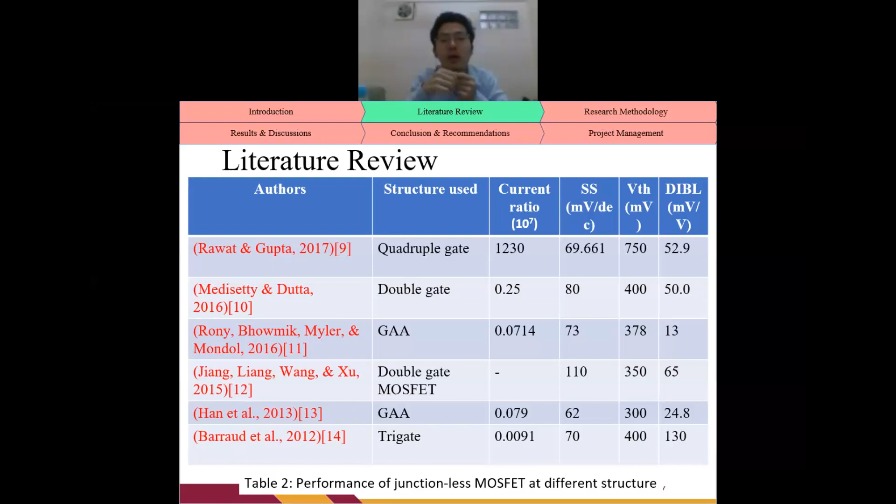One of the structures is a GAA MOSFET. GAA MOSFET is suitable to fabricate in junctionless as it turns off the device by creating a depletion region outside with its gate. GAA MOSFET will provide better gate controllability and low leakage current, which will be widely used in future. That's why I chose GAA MOSFET.

First, I have to find a suitable published paper to validate, then extract the graph and the parameters used in the paper. Next is fix the parameters mentioned in the paper and vary the parameters not mentioned in the paper, such as length of source and drain and gate thickness. Finally, compare both graphs.

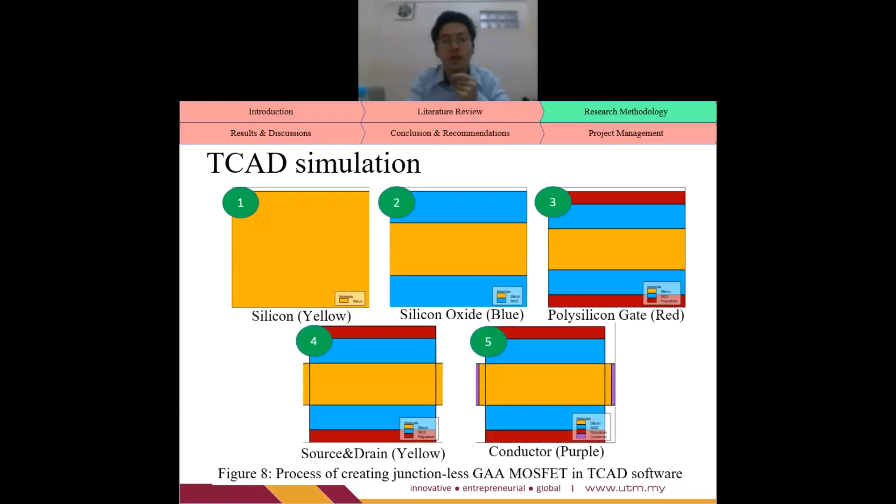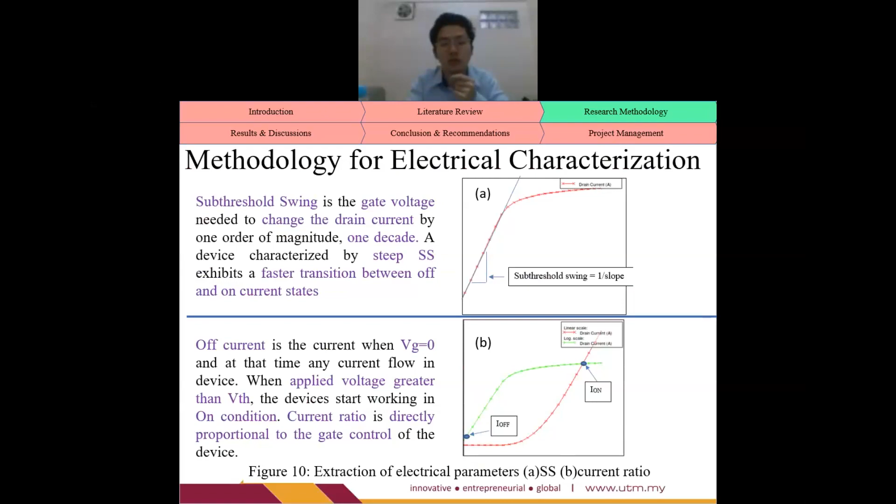This shows how I extract the electrical parameters such as subthreshold swing, which is 1 over slope, current ratio, I on and I off. Next is VTH threshold voltage, and the last one is DIBL, which is delta VTH over delta VD.

After that, I analyze the electrical properties based on VTH, current ratio, and SS. First, I vary doping level for NMOS and PMOS. In general, as doping level increases, VTH and current ratio will decrease, while the SS will remain constant. The purpose of this analysis is to know the effect of the parameters on the electrical properties.

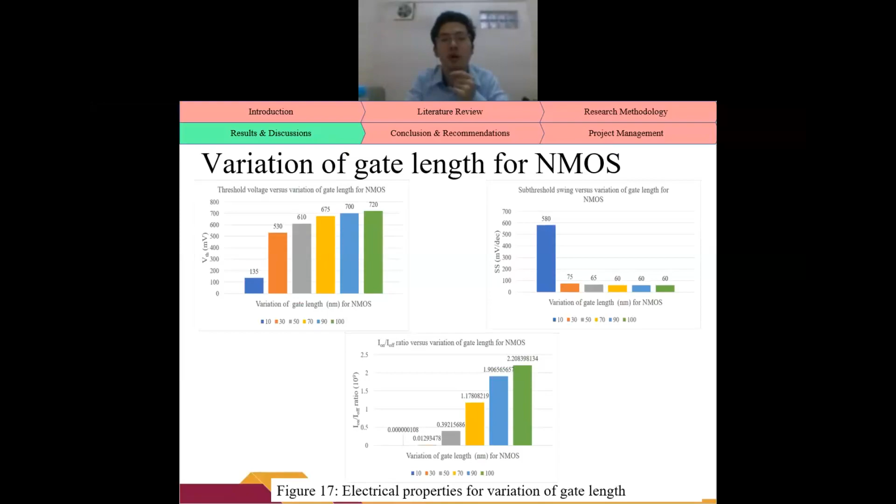Next, I repeat the same for the gate length. When the gate length decreases, VTH and current ratio will decrease, while SS will increase. For radius, when the radius is increased, VTH and current ratio decrease, while the SS will remain unchanged.

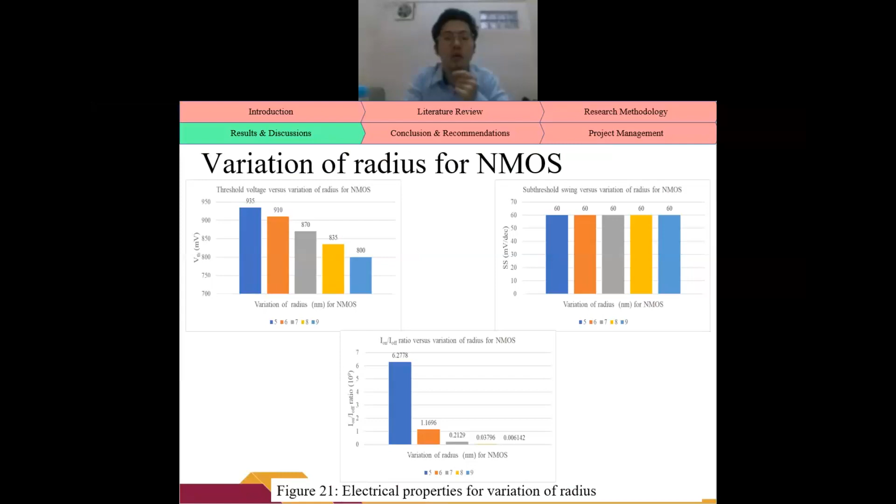According to Baker 2019, for the device to be implemented as an inverter, radius for the NMOS must be 2 to 3 times smaller than the PMOS, while the mobility for the NMOS must be 2 to 3 times larger than the PMOS.

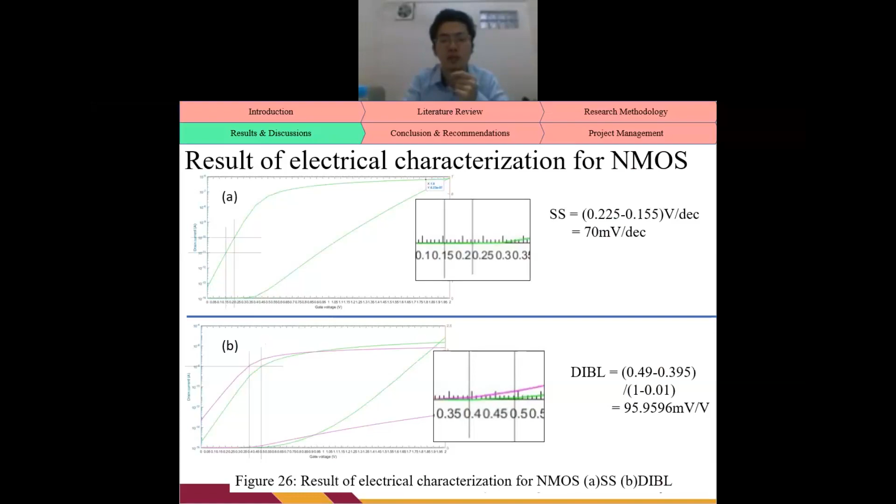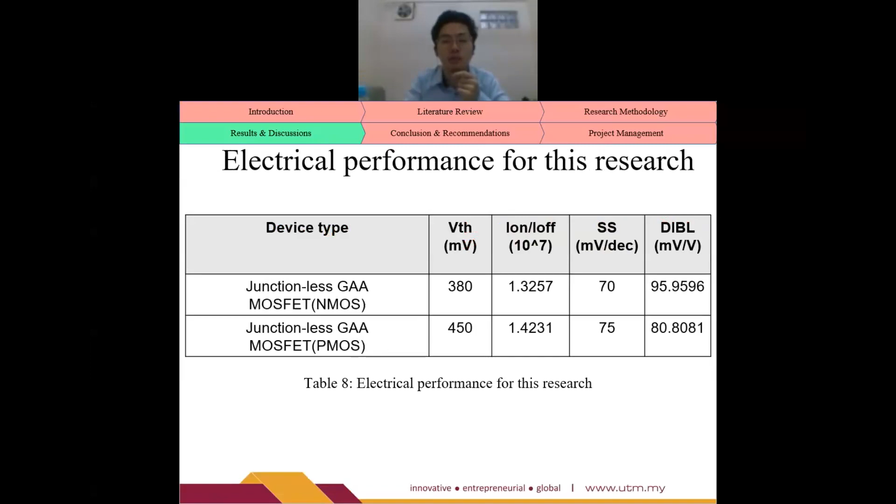So next, I summarize the final result for electrical performance for this research for NMOS and PMOS. For validation, the graph from a selected published paper is extracted and the result between simulation and published paper are almost the same. The best combination of device parameters was found, giving higher current ratio, better SS, and good DIBL.

This can fulfill the targeted value for low power logic. For future work, first I will apply the junctionless design to other structures. Second, use a lower dimension of gate length. Third, compact modeling of GAA MOSFET for digital circuit implementation. And finally, analyze the CV properties of junctionless GAA MOSFET.

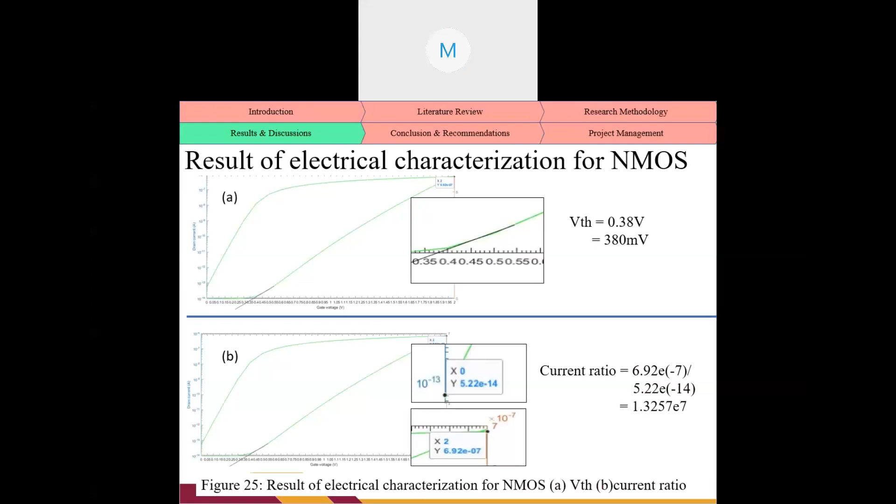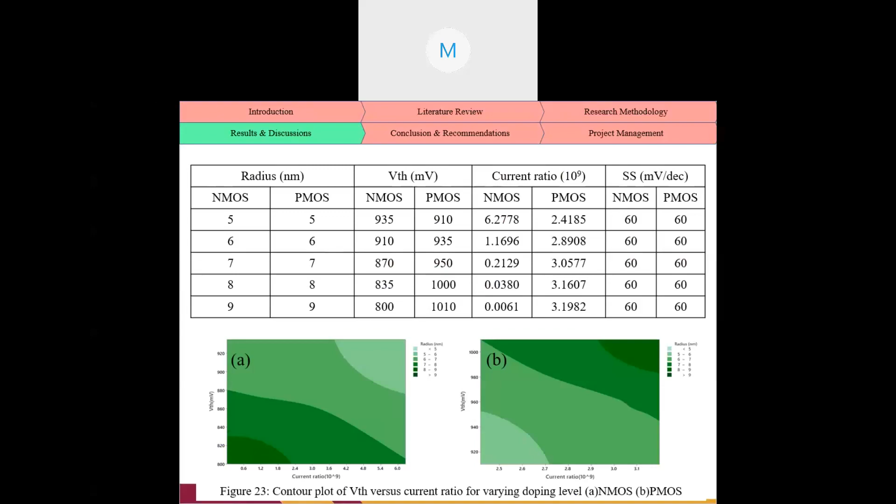The first question is, in the step you mentioned that you extract the data reported by other researchers, right? Can you briefly explain, is it validation, is that one experimental or simulation data as well? Simulation. Actually, the published paper is simulation, and then the simulation for the technology CAD simulation is my result, and then I compare both.

Okay, so what's the difference between this published paper and yours? So I follow exactly the same parameters mentioned in the papers. The exact difference is that this paper also uses junctionless MOSFET, but then it uses 1000 nanometer. After that, I reduced it down to 20 nanometer, which is my final result.

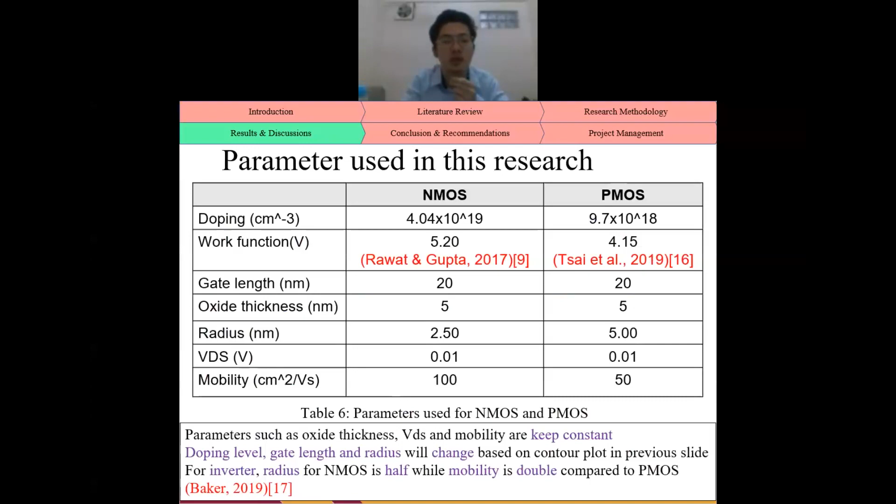This is my final one, gate length 20 nanometer. Because nowadays most of the MOSFETs are less than 22 nanometer, so I tried to reduce down the gate length and analyze the electrical properties.

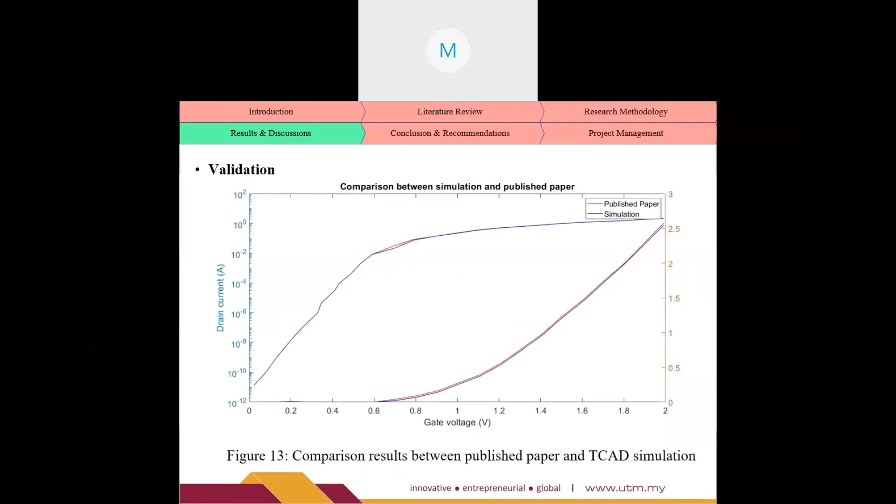All right. Okay. That's all from me. Thank you.

Kok Pao, you can say it's a trade-off. Sometimes if this increases, then this one gets a bit lower, that's called a trade-off. You can Google the term trade-off for your report later. Okay, thank you.

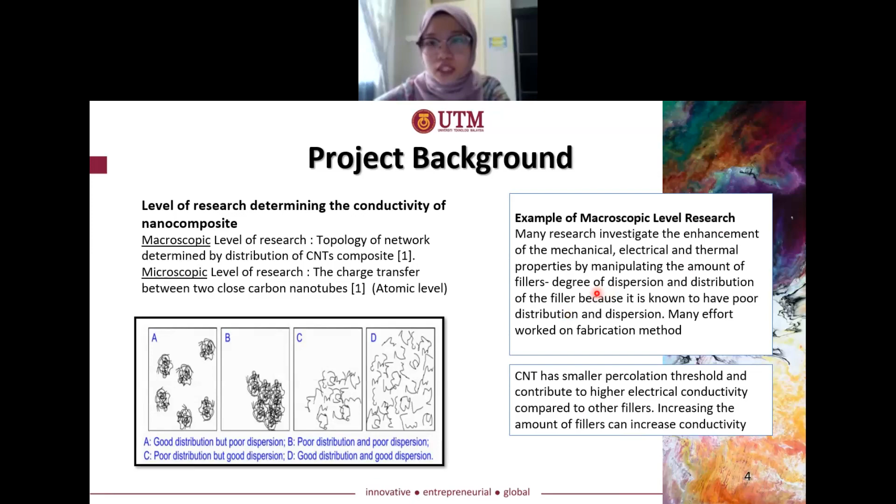The problem right now is that there is limited exploration on the microscopic level of studies, especially on the interaction of two close CNTs. So this is a few types of microscopic level of studies. The importance of microscopic level of studies is that...

It also affects the performance, especially the conductivity of dry electrode that consists of PDMS and multi-wall carbon nanotube. So my objectives are first, to compare the design structure and electrical properties of single wall and multi-wall carbon nanotube, and then to study the effect of tunneling on the electrical performance of multi-wall carbon nanotube.

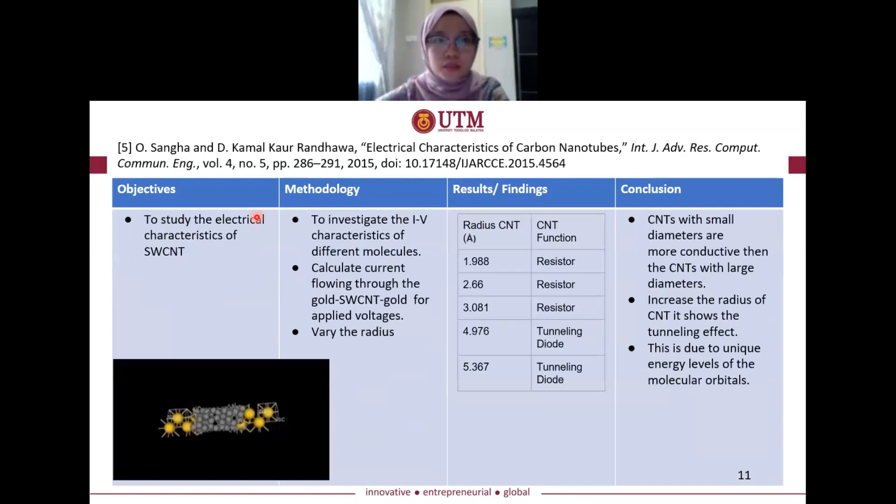So for my literature review, I'll be focusing on the literature review summary, and I'll be talking about the shortcomings of each literature review that I have done.

So the first literature only focuses on the electrical properties and application of CNT. So it lacks explanation of CNT's interaction.

The second literature is more onto the macroscopic level of research. That is also the same for the third literature, but it is focusing on the mathematical modeling. For the last literature, it talks about the tunneling between two materials, gold and single wall carbon nanotube, however it manipulates the diameter of CNT.

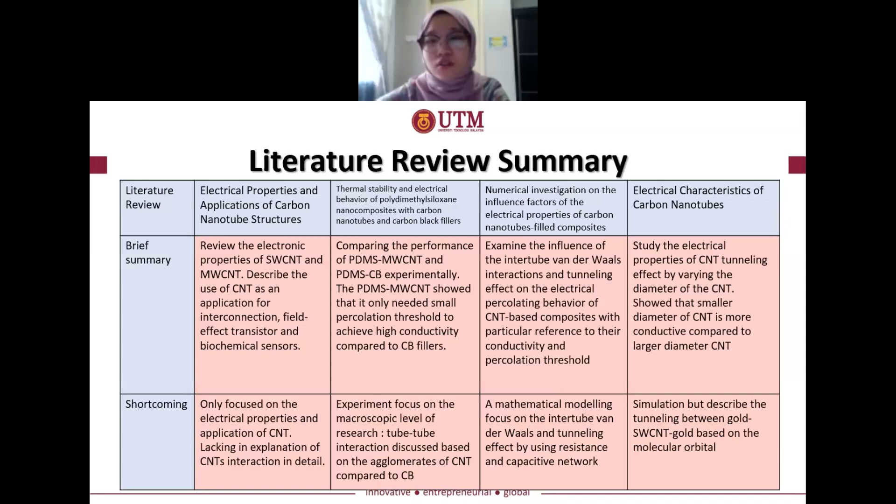Based on that, my methodology is first we need to understand that there are two types of structure that I did. First is bulk, and for this simulation I use QuantumWise. So first I do bulk simulation and then a device structure. The difference between these structures is the device one has electrode potential and also gate potential.

From there I simulate the transmission spectrum, then simulate the transmission spectrum of the device, and then compare between the bulk and the device transmission spectrum. If it is equal, what I did is complete all of the simulation for single wall carbon nanotube to understand the electrical performance.

Then I manipulate the gap distance from 0.3 nanometer to 0.6 nanometer. So the complete simulation is first looking at the transmission spectrum, electrostatic difference potential, and then the transmission spectrum are manipulated with the electrode potential from 0 to 2 volt.

Then I did the graph of current versus voltage and varied the temperature from 0 to 2000 Kelvin, and looked at what is the effect of temperature on the conductance.

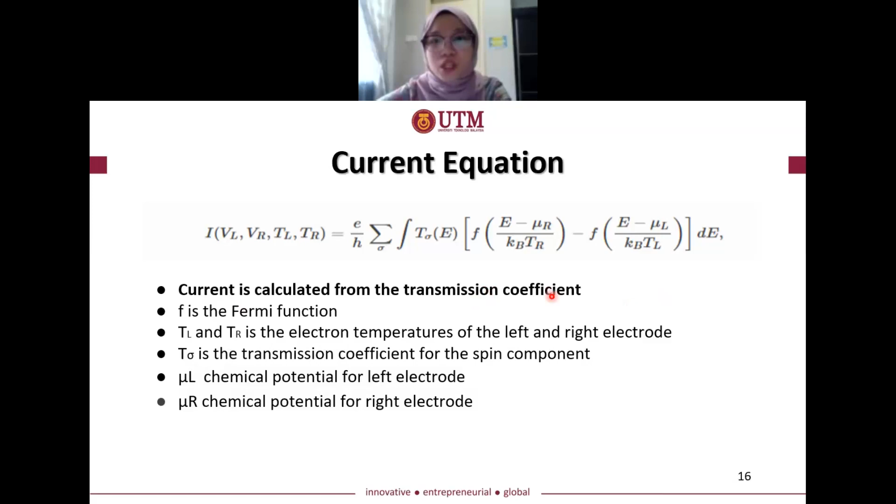Then I simulate the current versus bias voltage. What we can see here, single wall is directly proportional to the bias, but the electric current does not increase distinctly. If we zoom in, we can see the difference in the temperature.

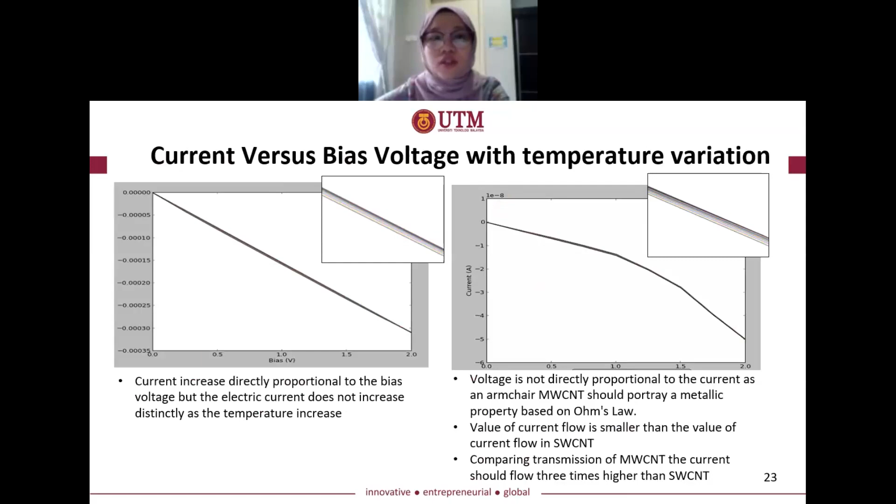Now what I did is manipulate from 0.3 nanometer to 0.6 nanometer tunneling distance. What I got is that the electrostatic difference potential shows there is an effect of the gate around the metal and dielectric region, and the potential is growing bigger at the junction.

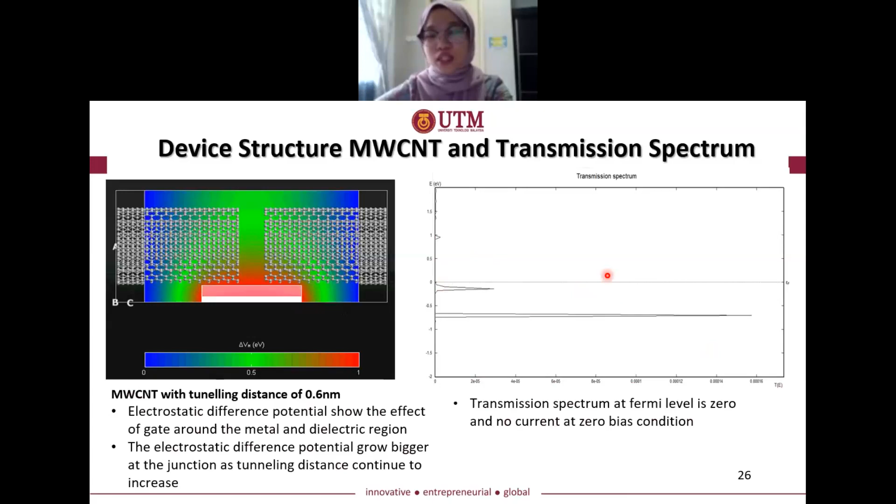So this transmission, after that, the transmission spectrum at Fermi level is 0, at the zero bias condition. From here we can see the current versus bias voltage: as the transmission coefficient decreases, the value of current also decreases. However, the current still conducts electricity as the voltage bias increases, but there is a constant or stagnant value from 0.5 to 1.25.

We can look further by analyzing the transmission spectrum. Looking at the transmission spectrum, there's a bias voltage range from 0.5 until 1.25 where the transmission energy is the same amount, and it differs at 1.5 volt, where the transmission energy had increased. That is why the current value also increased during this time, while it remained constant from 0.5 to 1.25 volt.

Based on that, we can see that the transmission spectrum of multi-wall carbon nanotube for bulk simulation is actually 3 times higher than single wall. But the transmission spectrum for multi-wall carbon nanotube with gap distance is smaller than single wall.

The IV characteristic for gap distance of 0.3 nanometer is not directly proportional anymore and has a lower current value compared to the single wall. This is also the same for 0.6 nanometer, which has even lower current and a stagnant value at certain bias voltage. From the temperature conductance, we can see that there are no distinct effects at all.

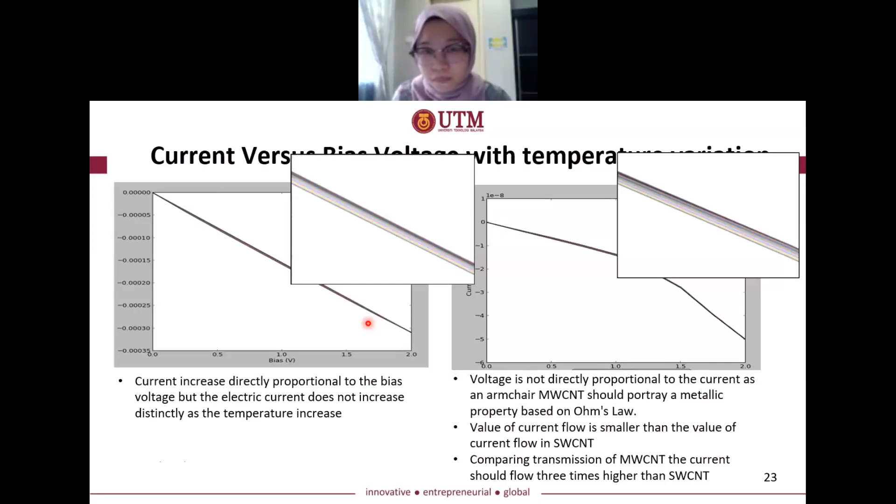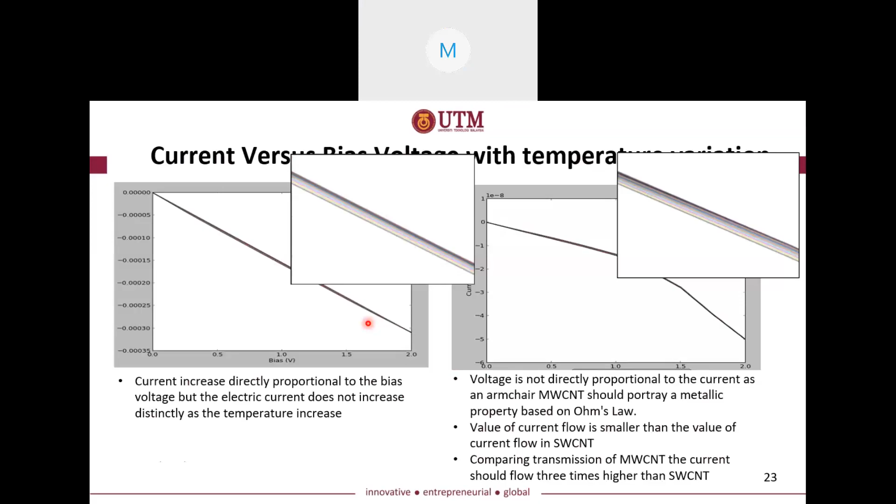In your result presented just now, as you increase the voltage, there is no change observed in the transmission spectrum, right? But for voltage 1.5, it suddenly slightly increased. Is there any reason about that? Maybe can you elaborate a bit?

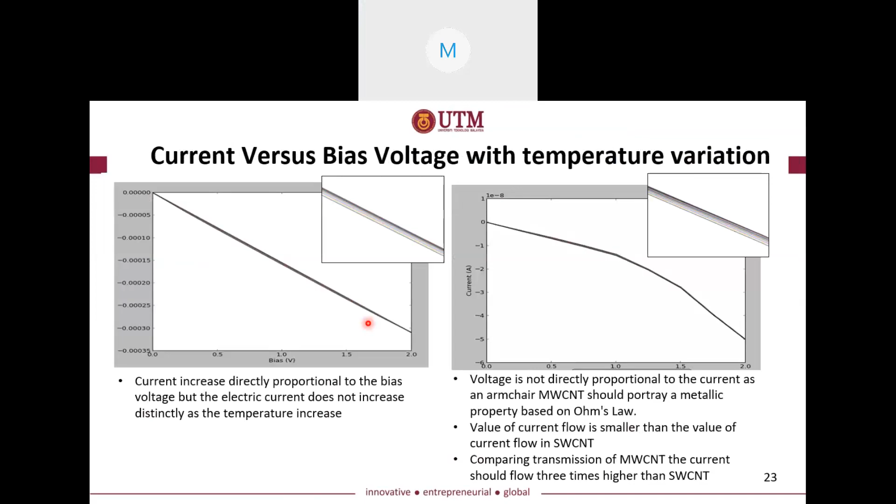For this one, no I think before this, the one with many pictures earlier. Is it this one? No. It's after this one maybe, next. Here.

Just now you said that for all biasing voltage from 0.5 up to 1.25, there's no difference in terms of energy, but for 1.5 it changed, is there any reason about that? Yes there is, because the current, based on the calculation and the equation, is derived from the transmission coefficient.

From here we can see that at 0.5, the Fermi level from right electrode to left electrode, the transmission energy only has this amount. This amount is the same for bias voltage 0.5, 0.75, 1 volt, and also 1.25 volt. So all of this transmission value is the same, that's why the current is the same.

However, when it reached 1.5 volt, the transmission had increased. At this value, the Fermi level of the right electrode to left electrode shows a transmission value here, and that is the reason why the current also increased.

So in the meantime, we move on to Jiawi. Fadlin, you can switch off your webcam and relax. Dr. Izala said very good, because I was chatting with her just now. I asked how she was, she said very good. Okay, thank you, we proceed with Jiawi.

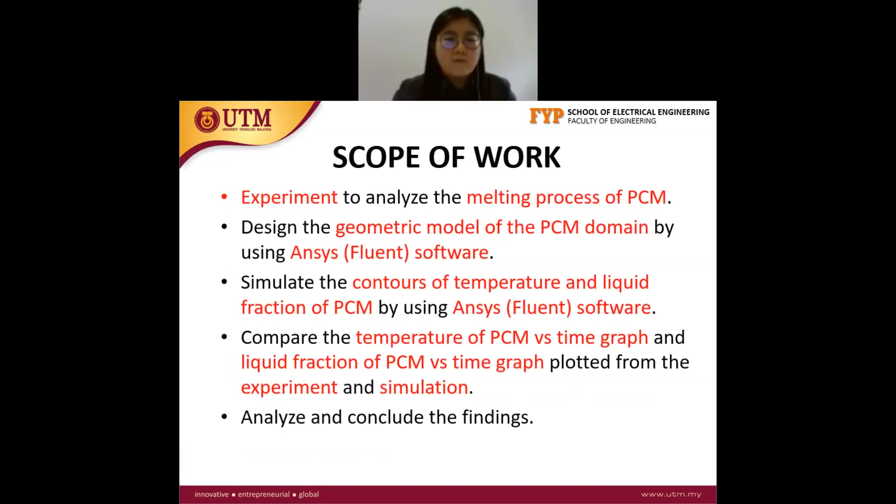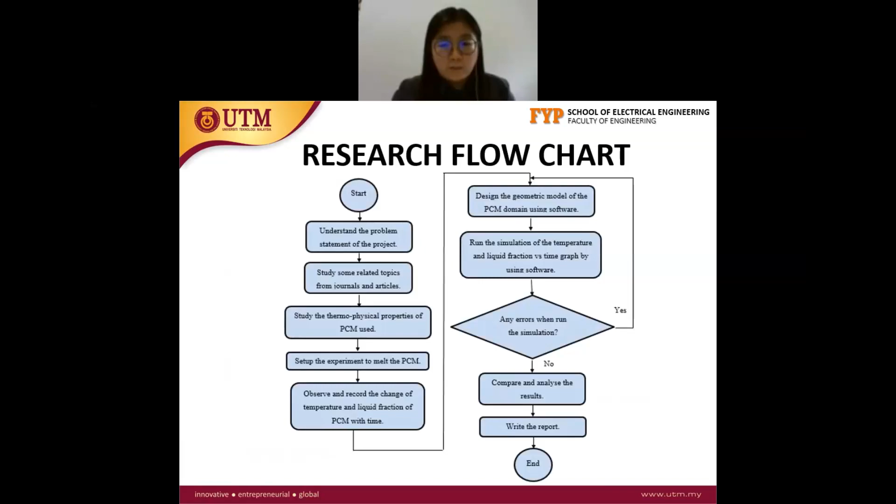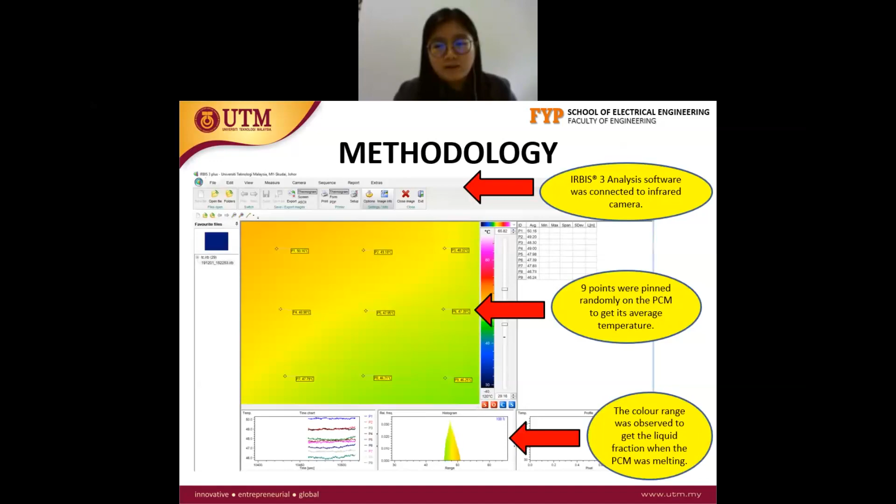The infrared camera was connected to IRBIS 3 analysis software. Then 9 points were pinned randomly on the PCM to get its average temperature. Then the color range was observed to get the liquid fraction when the PCM was melted.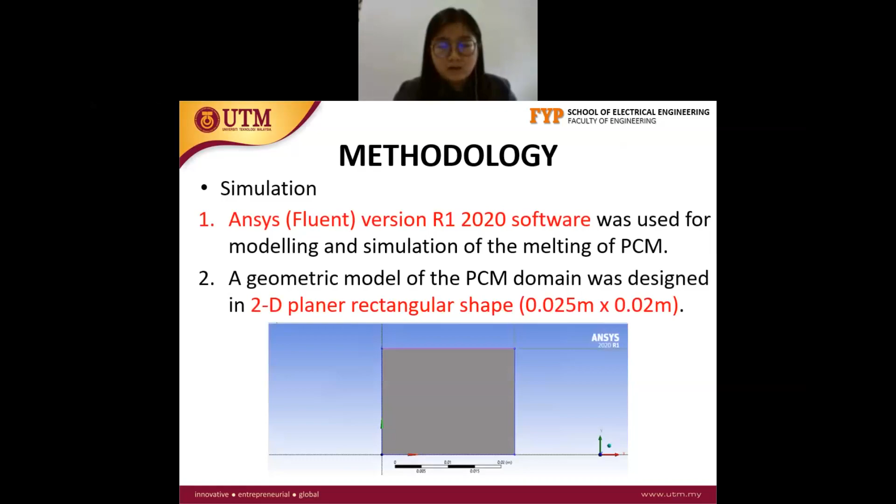For the simulation part, ANSYS Fluent version R1 2020 software was used for modeling and simulation of the melting of PCM. A geometry model of the PCM domain was designed in 2D planar rectangular shape, with a length of 0.025 meter and height of 0.02 meter. The calculations were performed using the default commercial CFD code in ANSYS Fluent.

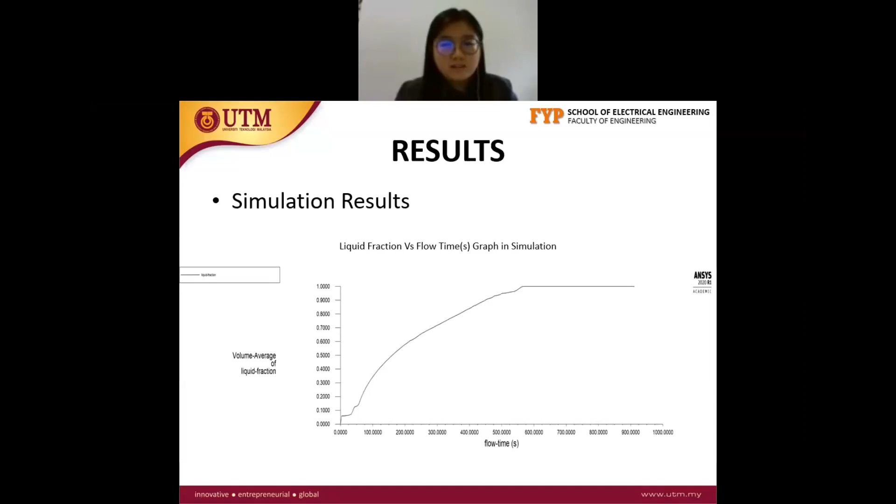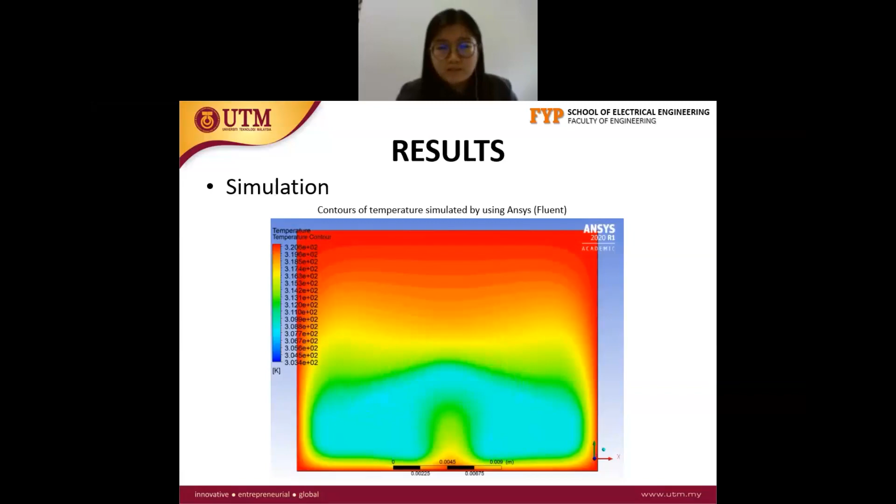This is the contour of temperature simulated using ANSYS Fluent software. From this video, we can see that the blue color zone shows the low temperature zone, and the red color zone shows the high temperature zone. The red color zone was increasing, meaning that the PCM was heated until the whole zone became high temperature, which is the red color zone.

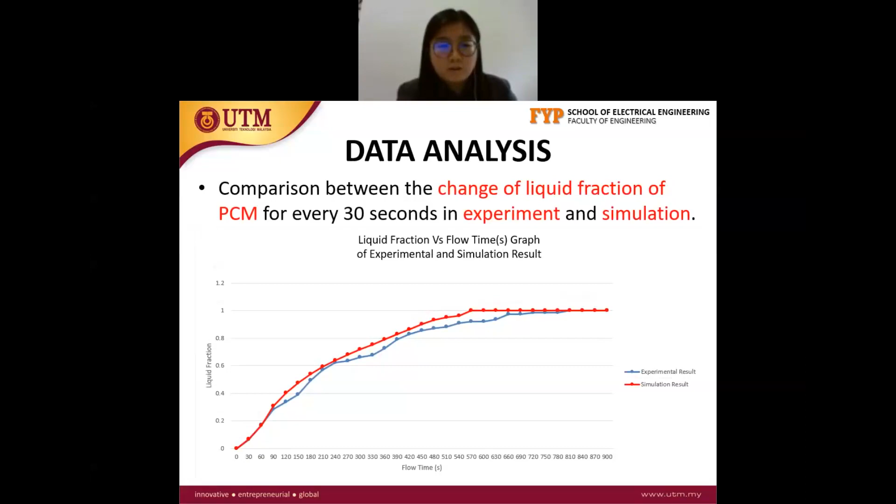This graph shows the comparison between the change of liquid fraction of PCM for every 30 seconds in experiment and simulation. We can see that around 500 seconds, all the PCM had changed into the liquid state.

So there are some differences between the experimental and simulation results. The simulation results and experimental results show discrepancy due to some reasons. For example, environmental disturbance: because the experiment was carried out in an air-conditioned room, the temperature applied to the PCM will be less than 333 Kelvin, which will influence the experiment result. Next, contact thermal resistance between the specimen and the cell. And third, chemical impurities in the paraffin wax RT35.

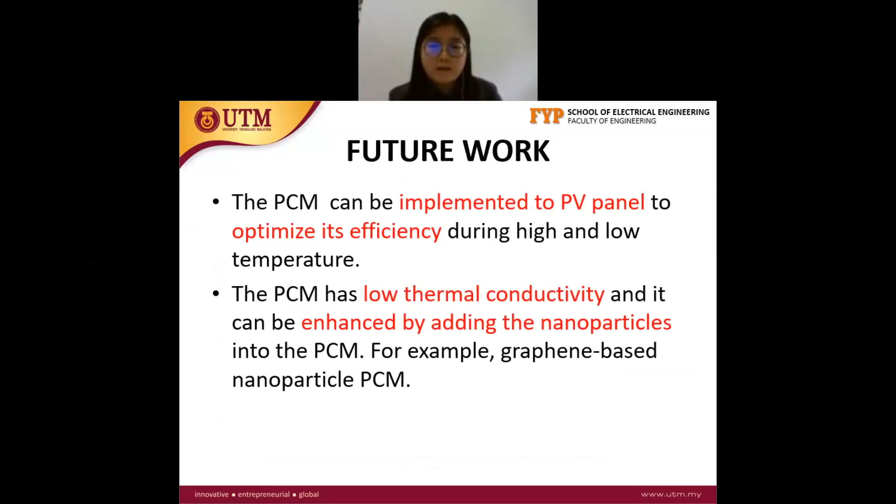This is the future work of my research. The PCM can be implemented into a PV panel to optimize its efficiency during high and low temperature. Next, the PCM has low thermal conductivity, and it can be enhanced by adding nanoparticles into the PCM, for example, graphene-based nanoparticle PCM.

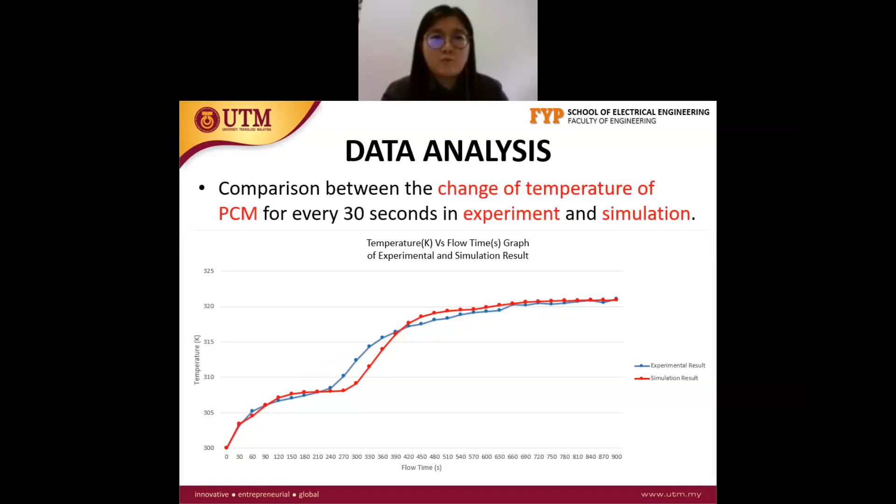In this experiment I used a small amount of PCM only. If I do it in a larger amount, maybe the time to reach the maximum temperature will increase because it needs more time to melt all the PCM. The time will be increased, the rate will be changed.

So in terms of your problem statement, it states that to increase the efficiency of the PV, you need to increase the temperature. Can we look at your problem statement again? Efficiency of the PV panel will be reduced by the increment of surrounding temperature. Oh, so to make it efficient, since efficiency will reduce, you need to reduce the surrounding temperature. So in that case, reduce the temperature on the surface of the PV panel.

I'm sorry, repeat your answer again. I need to reduce the temperature on the surface of the PV panel because I cannot change the surrounding temperature, right? So I apply the PCM on the PV panel to try to cool down the surface. You get what I mean? Okay, so the temperature you measured in your experiment is the temperature of PCM, not the temperature on the surface of the PV panel. Oh, okay.

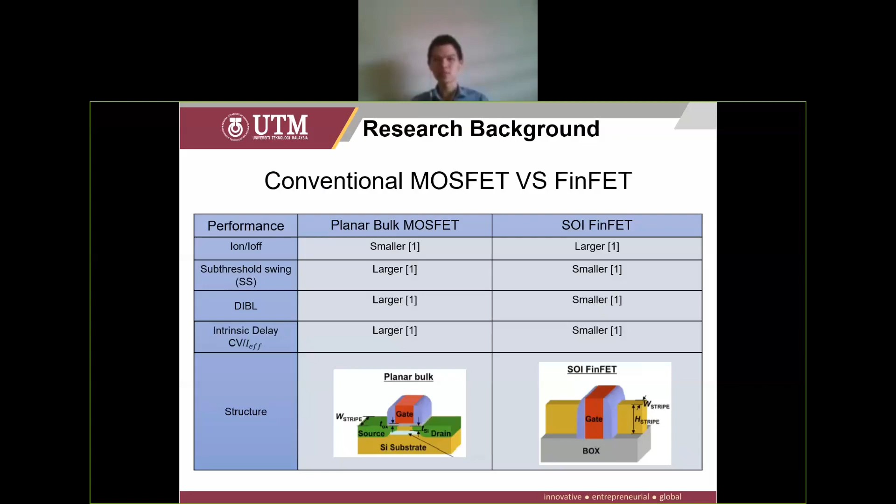This is the comparison between the conventional MOSFET versus FinFET. Overall, we can see that the SOI FinFET has better performance compared to the MOSFET, especially the current ratio. So what is the Taguchi method?

The Taguchi method is an optimization method to minimize the number of experiments and reduce the cost and time. In this project, I'll be using the L9 Taguchi method.

In this work, I will create a nanowire FinFET transistor with 22 nanometer gate length. Then I will add strain silicon to the transistor. Next, I will optimize the parameter using the Taguchi method, and finally observe the performance.

My research objectives: first, I will build a structure of strain silicon nanowire FinFET transistor, and second, I will optimize the process parameter of strain silicon nanowire FinFET by using the L9 Taguchi method.

For my research scope, the strain silicon nanowire FinFET is created using the Sentaurus TCAD tool, focusing on the 22 nanometer gate length. Second, I will optimize the performance parameter using the Taguchi method with the Minitab software.

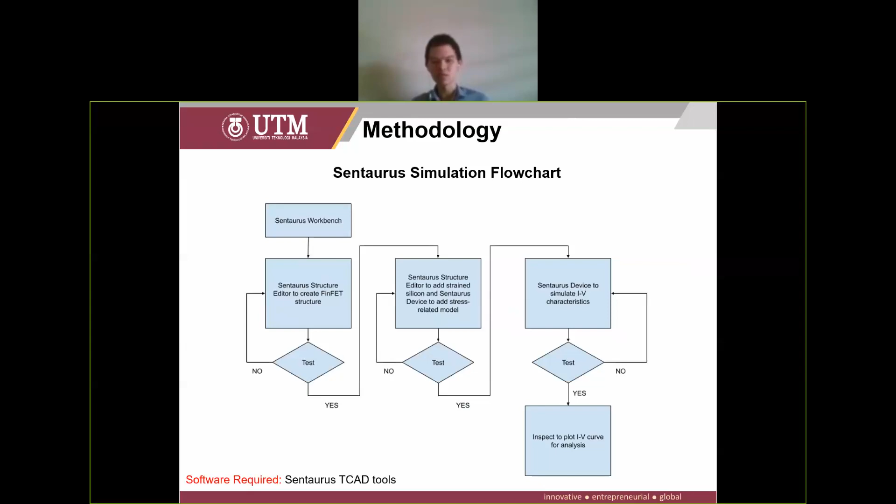So for result discussions, this is the FinFET structure that I have created from the Sentaurus tool.

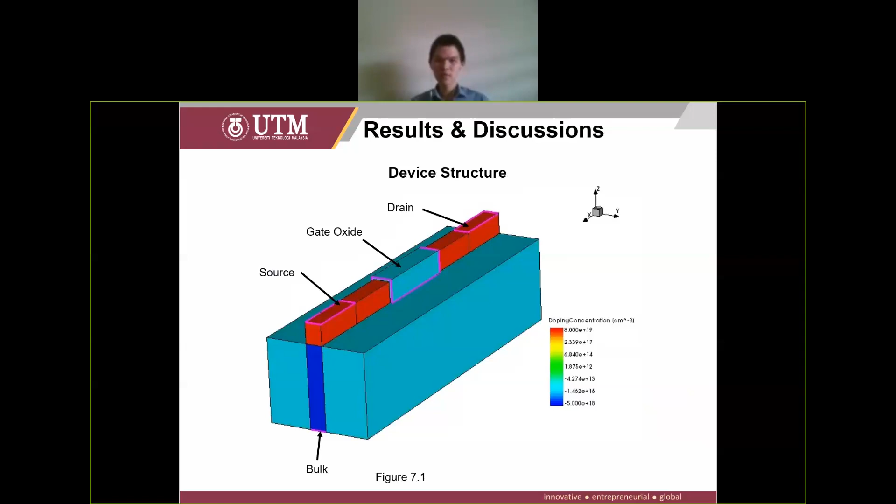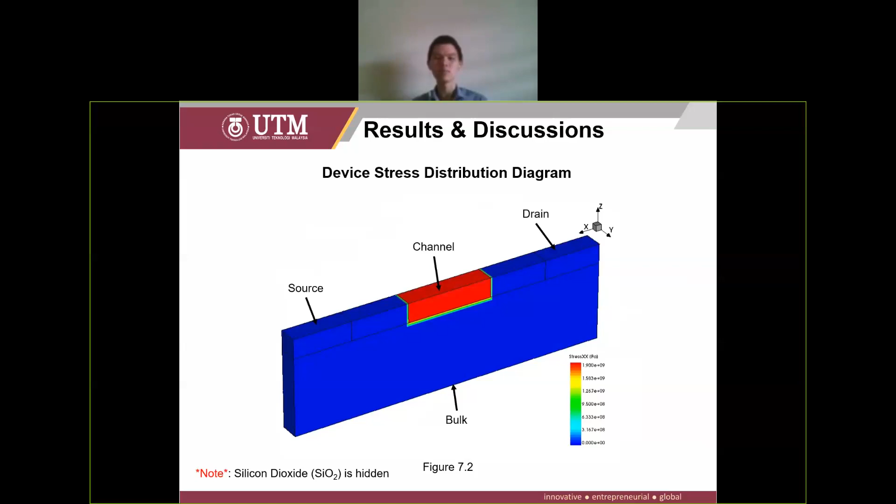This is the stress distribution diagram, and we must note that the silicon dioxide is hidden over here so that we can observe the channel stress distributions.

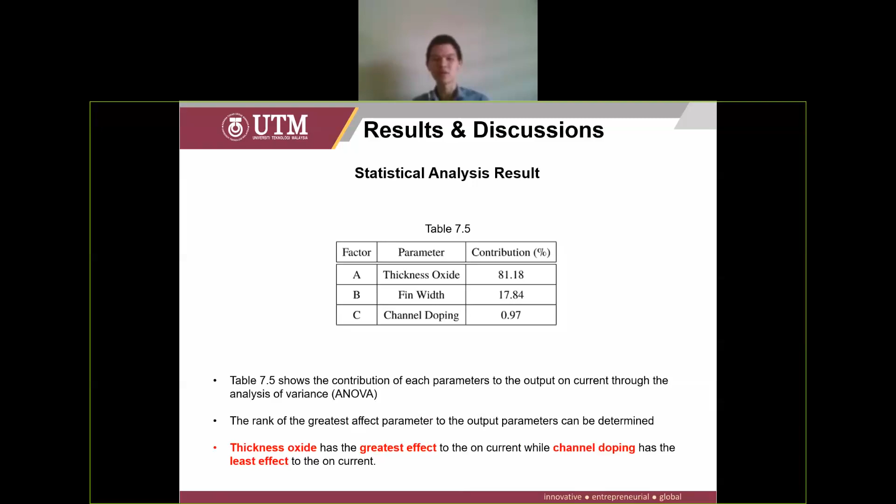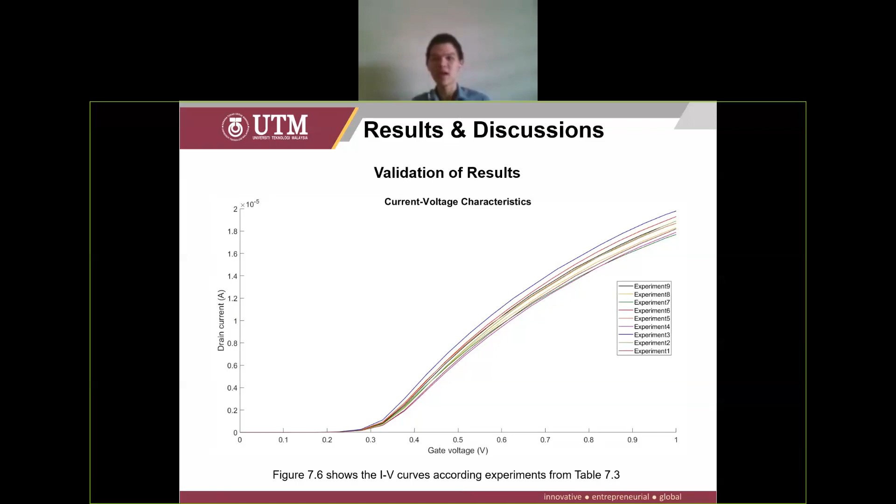This is the current voltage characteristic according to the experiment from table 7.3. The blue color line is experiment number 3, which has the highest on current value, matching table 7.3.

For conclusions, strained silicon nanowire FinFET is built using the Sentaurus TCAD tools. The device performance is optimized based on 3 device parameters using the Taguchi method. The best combination of parameters for on current is obtained, and the rank of greatest effect parameters on current is obtained.

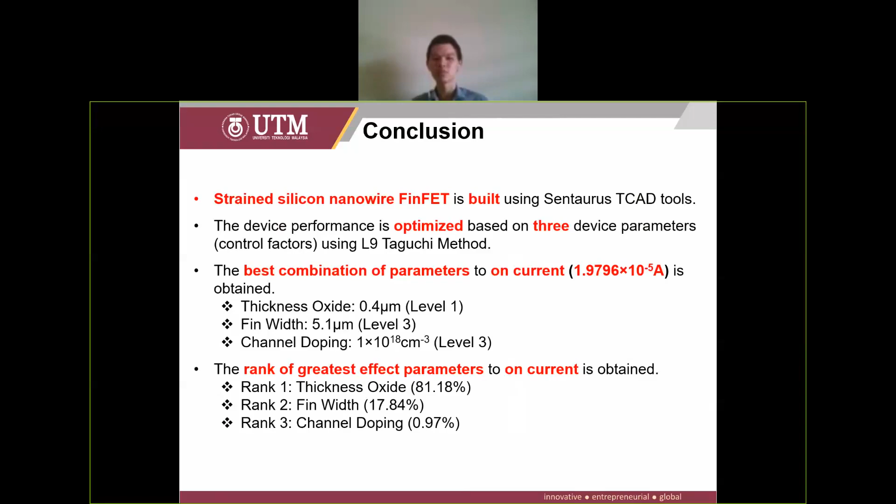For future work recommendations: use higher order Taguchi methods such as L11, L13, or L27 to include more control factors. Second, reduce the dimension of the transistor using gate length less than 22 nanometers. Third, we can try other electrical properties such as leakage current and threshold voltage.

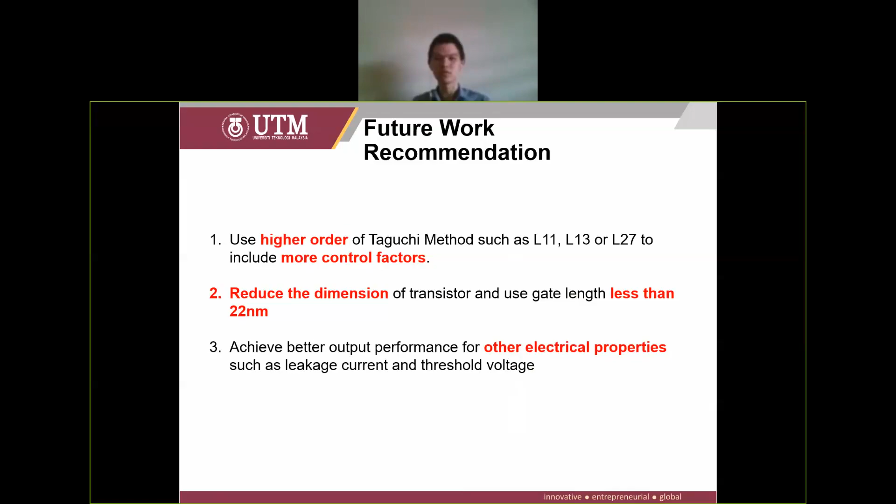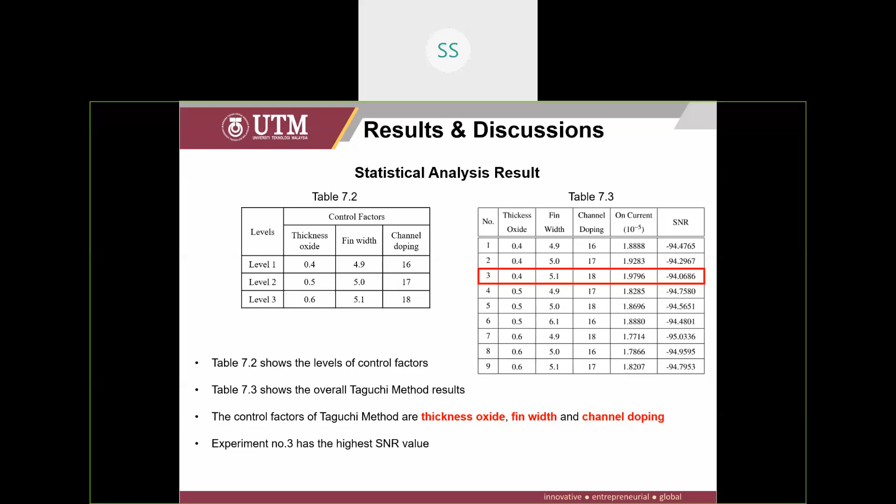Chinam, how do you introduce the strain? How am I introduce the strain? So actually in Sentaurus, we have tools like the Sentaurus Structure Editor and Sentaurus Process. Last time I'm using the Sentaurus Process, but the simulation time is too long, like it would take the whole day to run one experiment.

So after that I changed it to the Sentaurus Structure Editor. The method that I use to introduce the strain silicon is to induce the strain inside it, which means it's the alternative solution for me to introduce the strain stress into the transistor. Do you understand? Is it induce the strain in the structure editor? Yes.

So you put some value of the strain percentage, like that. I give here, can you see the stress applied on the channel? Which means I directly give the stress to the channel, I did not put the strain silicon on it.

Okay, I understand. So this stress is not part of the parameters that you vary, is it? No. Okay, this is fixed constant. Okay, understand.

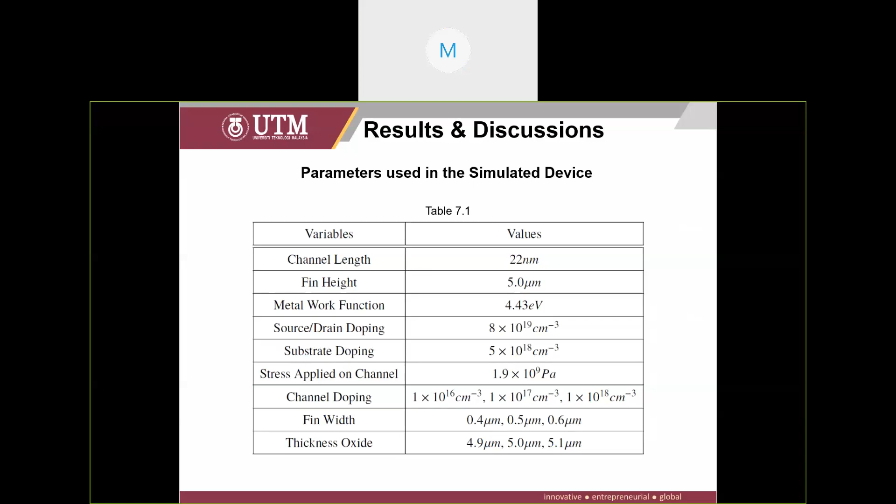Thank you. All right, okay Dr. Mastura. Okay, so in your optimization, can you go to your problem statement slide? Okay.

Okay, it seems that there are four main problems: short channel effect, low driving current, high subthreshold slope, and high leakage current. So it seems that you chose to optimize in terms of driving current, right? Is there any reason that you chose that issue rather than the other three?

For this question, because I have reviewed back to the literature and I found that not many people are doing optimization on the low driving current. Most people are choosing the high leakage current, they are trying to optimize that problem. Then no people try to solve the low driving current, so I would like to try on this.

Okay, so in terms of application, that criteria in terms of ranking of priority, is it related to the priority in terms of design, so that you look on that issue?

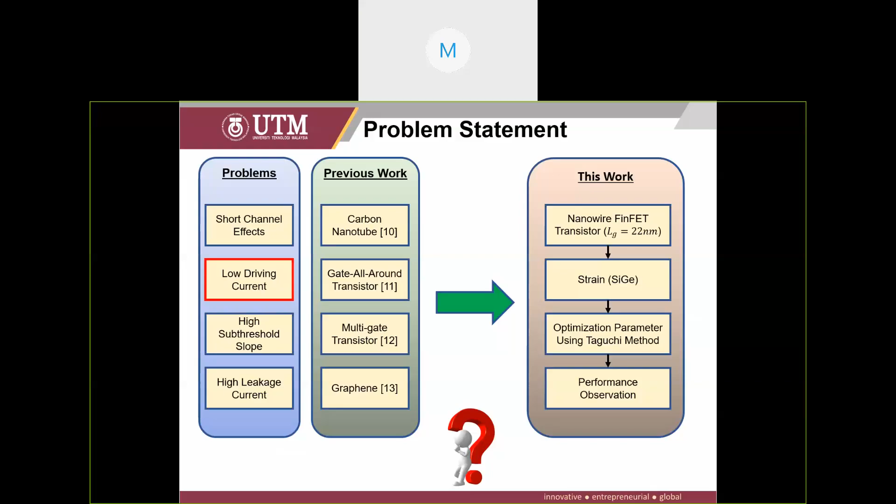All right, and then by performing this optimization using Taguchi method, there are three main parameters, like just now: thickness of gate oxide, what else? Fin width, and what is the last one? There are three parameters, right? Channel doping. So how did you decide these three, or based on optimization did you come up that these three parameters?

Because I reviewed back to the literature, many people use the special characteristics of the FinFET, like the fin width and fin height, which only exist in the FinFET. So I reviewed back, and many people do optimization using the fin width, fin height, and top fin width or fin height, varying the same dimensions of the transistor. So that's why I chose the dimension of the device, the fin width. Then I chose the doping, like the channel doping, and also the dielectric material, which is the oxide thickness. I want to see the difference between these three control factors.

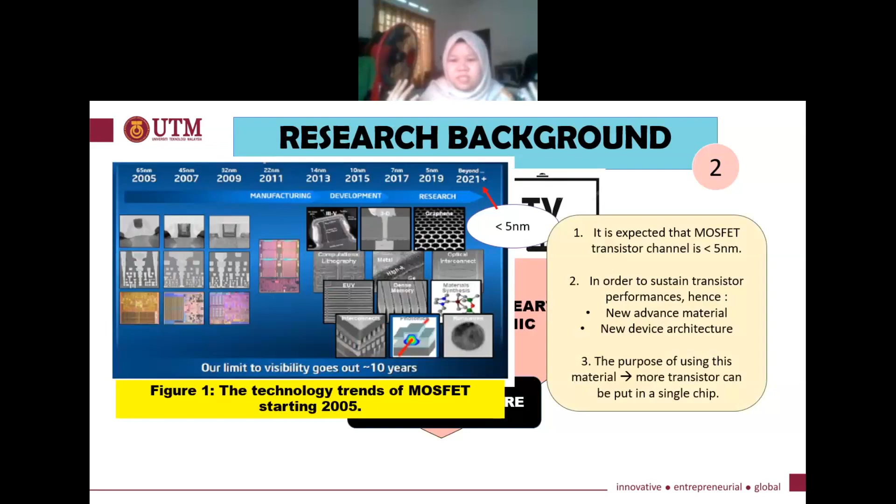Starting from 2013 onwards, many researchers are working hard looking for alternatives to sustain transistor performance. Some examples are using new advanced materials and new device architectures. The purpose of using this material is because we want to put more transistors into a single chip. As stated by Moore's Law, the number of transistors on a silicon chip will roughly double every 18 months. So now all the transistors and other parts of the device have reached nanoscale dimensions, and further reducing the size would lead to, first, short channel effects, and second, power issues like high static power caused by intrinsic leakage currents.

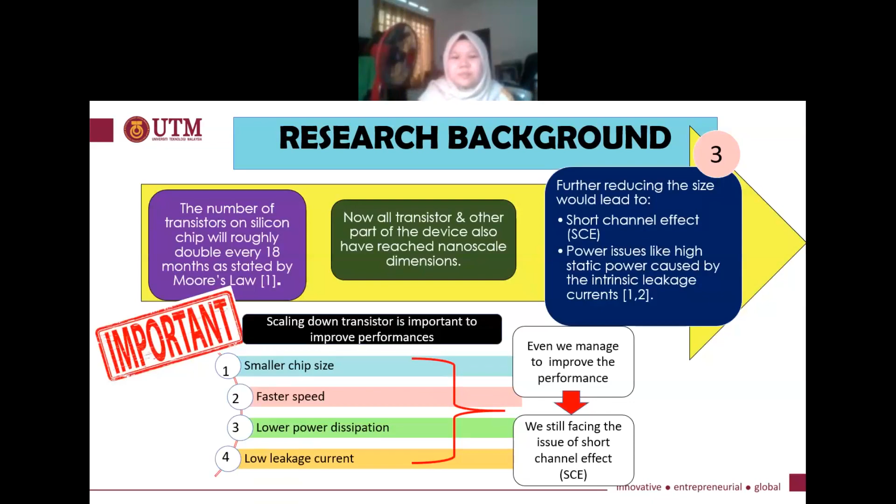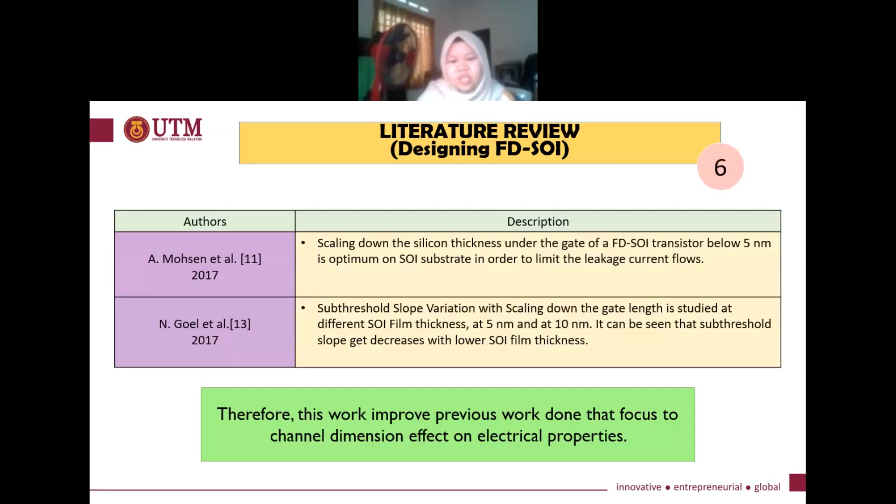So why is scaling down the transistor important? Because we want to improve performance in terms of smaller chip size, faster speed, lower power dissipation, and low leakage current. However, even if we manage to improve all this performance, we are still facing the issue of the short channel effect. This is the literature review related to fully depleted SOI, and this is the literature review related to designing FD-SOI. Therefore, this work improves previous work done that focused on the channel dimension effect on electrical properties.

This slide is about the problem statement. The problem is that scaling down transistor dimensions has led to short channel effects and performance degradation. Previous work has been done on new advanced materials and new device architecture. In this work, I varied the gate length of the FD-SOI MOSFET, studied the performance of the FD-SOI MOSFET, and lastly, I will study the electrical properties of the FD-SOI MOSFET in terms of threshold voltage, off current, on current, and sub-threshold slope, SS.

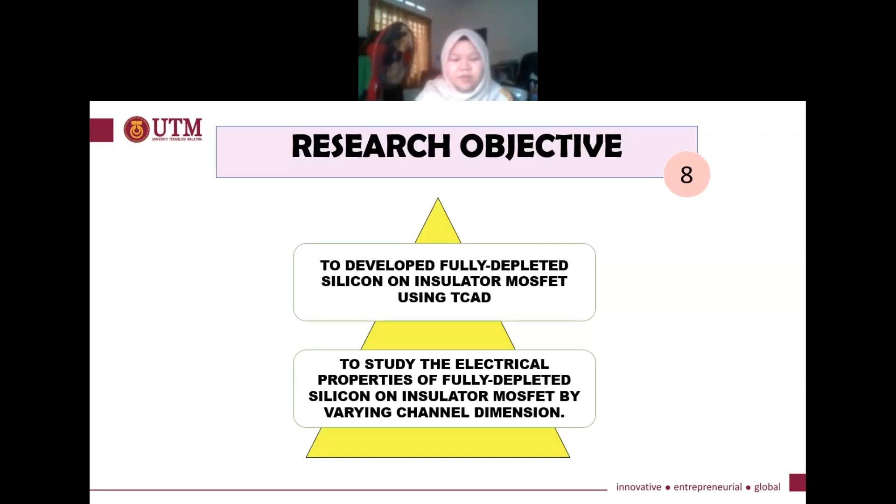This is the research objective: number one, to develop a fully depleted silicon on insulator MOSFET using TCAD. Second, to study the electrical properties of the fully depleted silicon on insulator MOSFET by varying the channel. For research scope, the software I am using to simulate all the results is Synopsys Sentaurus TCAD.

The device I focus on is the fully depleted silicon on insulator MOSFET. Here I generate the IV characteristic in terms of the threshold voltage, off current, on current, and the SS, varying the gate length to focus on short channel less than 50 nanometers. I'm choosing 5 values: 40 nanometer, 30 nanometer, 25 nanometer, 15, and 10 nanometer.

This is the methodology where I start with literature review, then develop the structure, vary the gate length, vary the gate oxide thickness, generate the IV characteristic and check the electrical properties, and lastly study the performance.

This is the structure of the FD-SOI device, where there is a silicon SOI film thickness in between the drain and source. Then we have an additional layer of oxide, which is called BOX. So in this work, there are two things that I vary.

First is the gate length. As you can see, there is a structure when LG is 10 nanometer and the other one is 40 nanometer. Then I vary the gate oxide thickness: first one is 5 nanometer and second 8 nanometer.

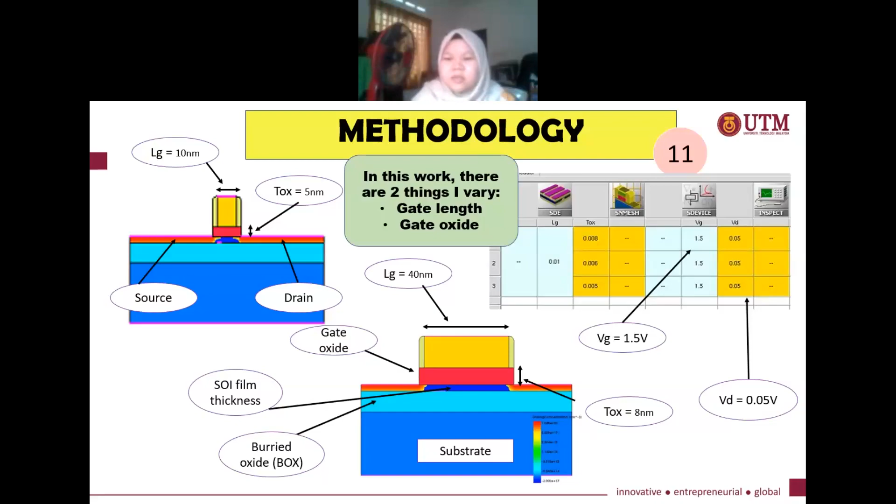This is the IDVG characteristic of 10 nanometer and oxide thickness of 5 nanometer. Here, for VG 1.5, I obtained the VTH of 0.54 volt, ion 0.63 milliampere, I off 864.19 femtoampere, and lastly SS 106.28 millivolt per decade.

So how I obtain the result, this is how I extract it: I on, VTH, the SS, and the I off when the VG is 0.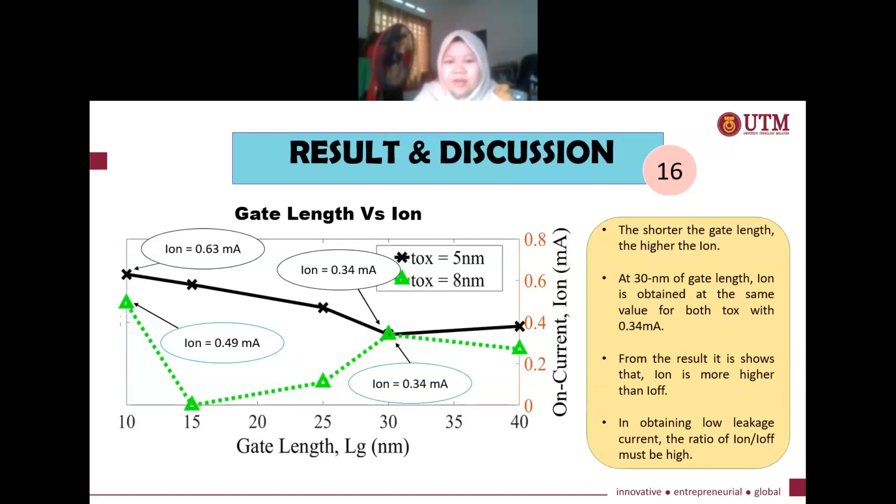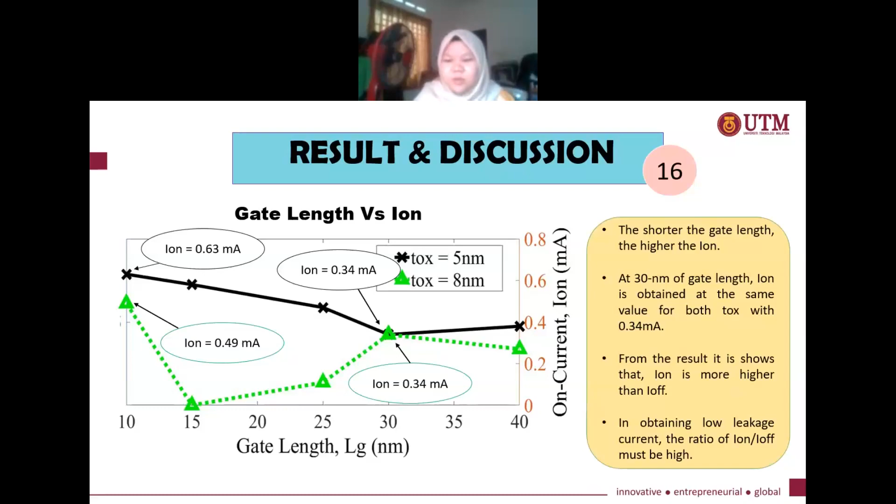Here is the gate length versus ion. The shorter the gate length, the higher the ion. At 30 nanometer gate length, the ion is the same value for both oxides, 0.34 milliampere. This shows ion is much higher than I off since ion is in milliampere while I off is in femtoampere. So in obtaining low leakage current, the ratio of ion over I off must be high.

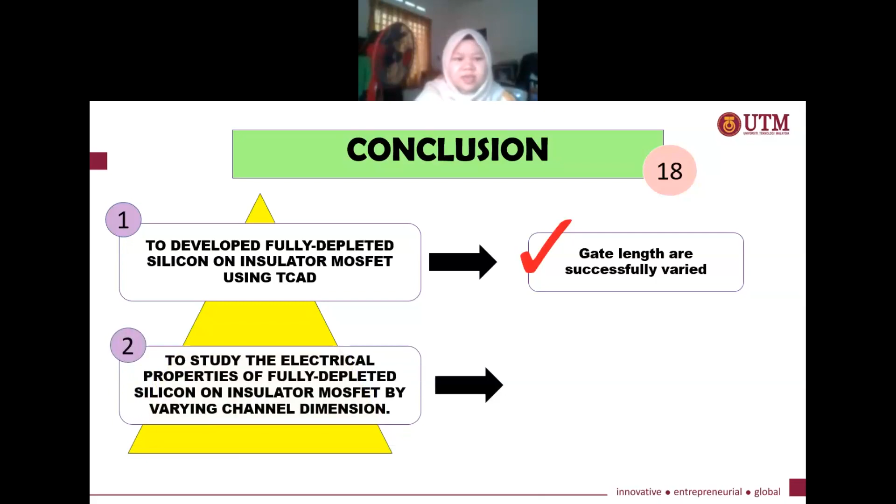As conclusion: for the first objective, to develop a fully depleted silicon on insulator MOSFET using TCAD, the gate length was successfully varied. Second, to study the electrical properties of FD-SOI MOSFET by varying the channel dimension, the performance is observed at LG 10 nanometer with electrical properties of VTH 0.54 volt, ion 0.63 milliampere, I off 864.19 femtoampere, and SS 106.28 millivolt per decade.

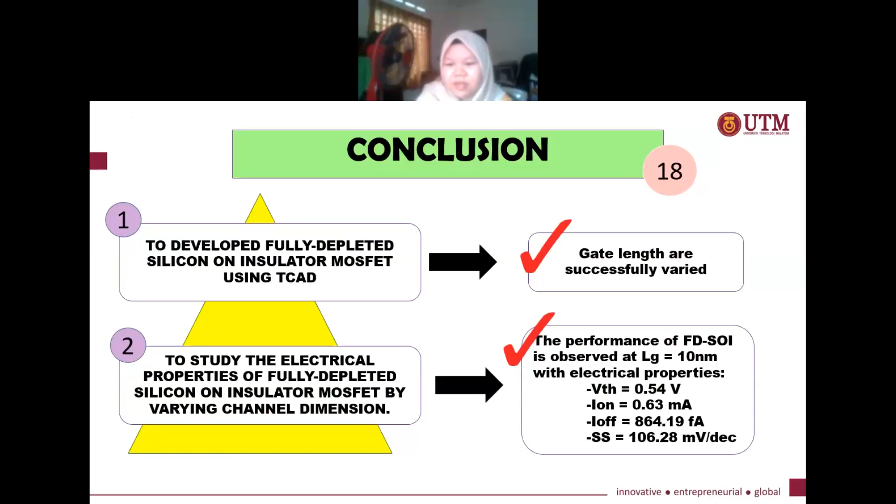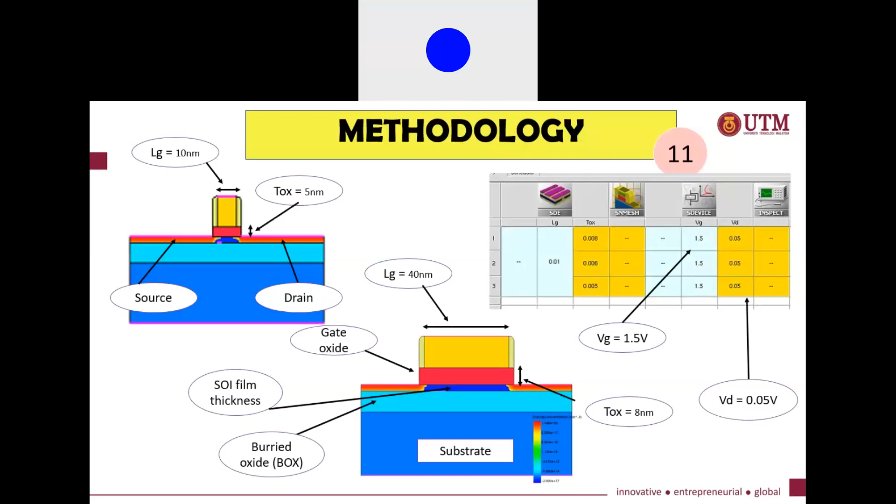Now we ask Dr. Suhana. Yang width tu maybe betul lah, Michael. Ainun can find out what is the default width in the Sentaurus. Okay, ada default dia, saya tak pasti. Is it 10 nanometer ke 100 nanometer ke?

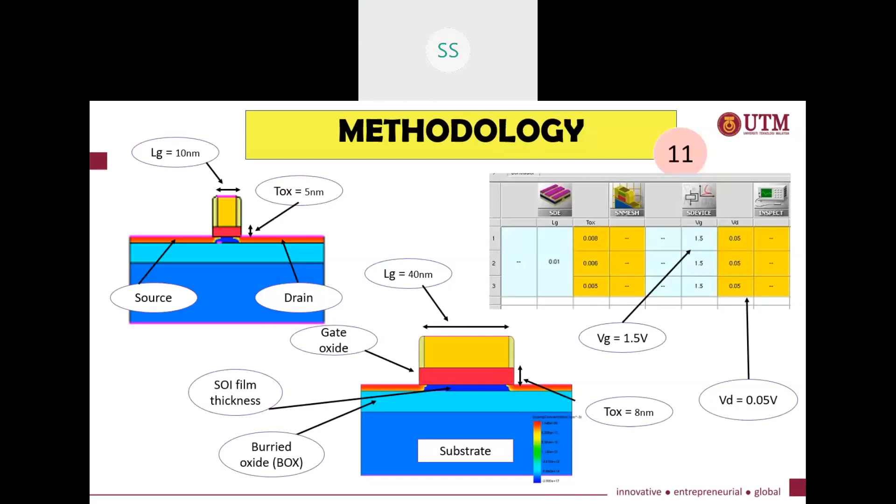You can find out lah, betul lah, you have to specify kat info. Alright, then why you, when you vary the gate length, you vary from 10 nanometer to 15 nanometer, to 40, yeah. I'm choosing below than 50 nanometer.

Kenapa tak pergi bawah lagi, 5 ke 2 ke? Because according to the timeline, I know that in 2020 we are now reaching below than 5 nanometer, but I think it is worth for me to investigate and choose 5 variations of gate length, and the maximum that I can go is 10 nanometer for this project.

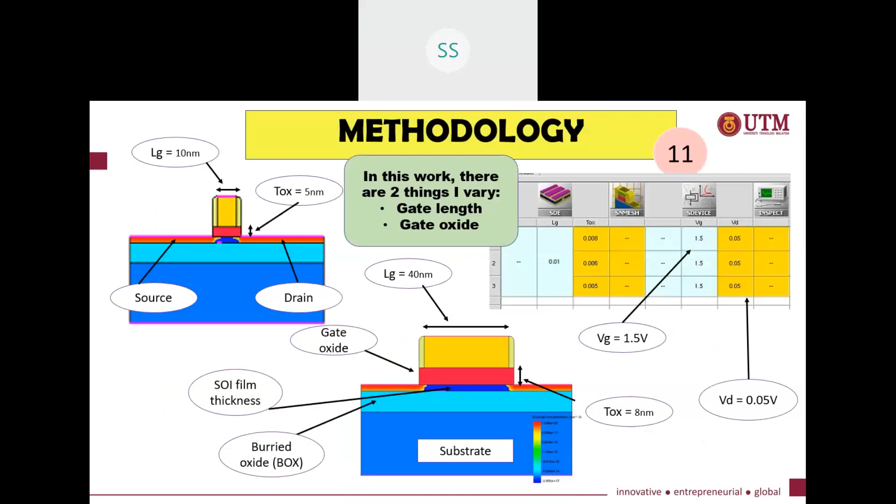The previous part you ada discuss about subthreshold slope kan? Yeah, tunjuk sekejap. Laju sangat you pergi, nak kerja apa saya pun tak tahu. Oh, I'm so sorry.

Oh, you dah letak sini dah. So conclusion pun kena tukar. Okay, thank you, sorry for that. Okay, thank you, setuju.

Alright, Dr. Mastura. Dr. Mastura have any comment? Okay, Dr. Mastura is here. Sorry, selalu macam ni. Okay, so you have tested for several combinations of gate length and oxide thickness.

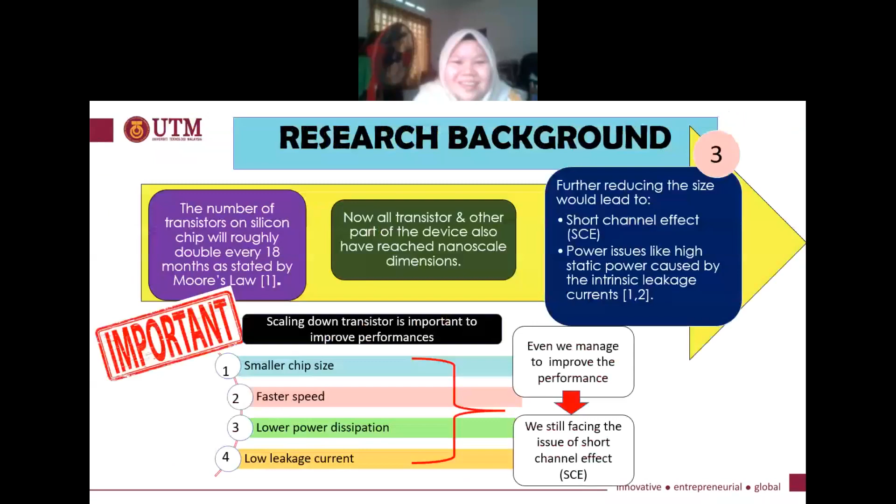Boleh tengok tajuk kamu tak? Oh boleh. Sebab bila saya tengok table, jadual ni macam tajuk lain. So this is my final tajuk. Sebab dalam saya punya timetable ni, phosphorene based logic gate. Okay, dah ni yang latest lah. Alright, okay lah, tu je lah soalan saya.

Okay, thank you Dr. Mastura. Alright, thank you Ainun, dah habis kan? Kita last one, kita ada the last one nanti. Wei Jian, Wei Jian, are you here or not? I check with you just now. You tak reply pun Wei Jian.

Good afternoon doctor. Can you listen clearly? Yes, can. Oh very smart. Smart, okay, can you share the slide? Yeah sure, you can listen clearly right? Can listen clearly. Oh alright okay. Share content.

Can you see my slide? Can, but how come when you talk got a lot of air, like a boo, like windy like that? Oh, I switch off my fan first. Switch off, don't switch off lah your fan, later you hot, nanti berpeluh pula present. Berpeluh, kesian dia. Now can listen better. Can, now very clear already.

So we need for the panel to fill up the marks first. Alright, so okay, how you feeling? Okay, makan already? Yeah, dah makan. So final exam coming soon?

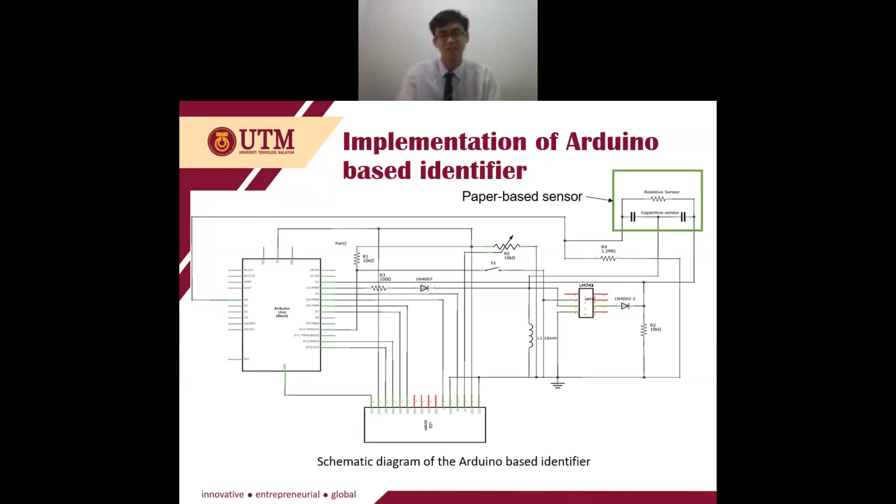So this is the experimental setup for the Arduino-based identifier, and it is connected with my PC and also the paper-based sensor.

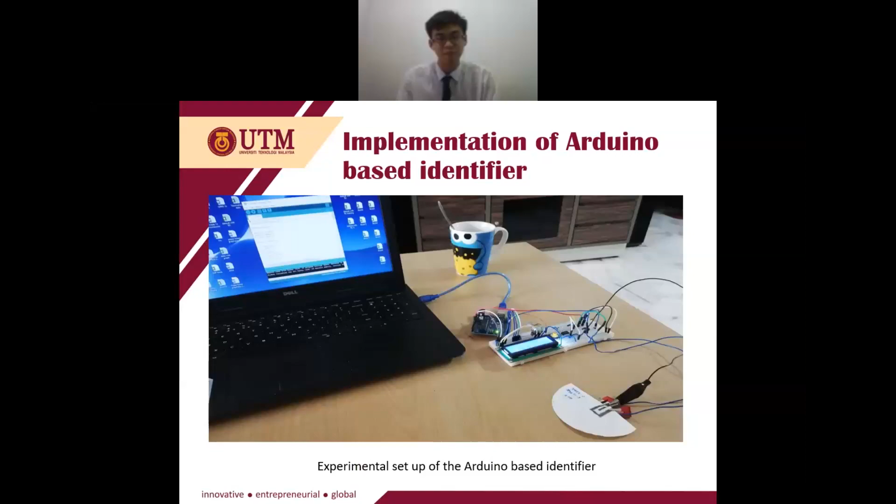For the sweet taste, I use sugar solution as the sample, and the process is the same as the previous taste, but the sensor is replaced with the new sensor, sensor DEV2.

Now this one is for tasteless. I use plain water as the sample, and the process is also the same, but the sensor is replaced by the new sensor, sensor DEV3.

Feature one is the resistance at t equals 1, meaning the first value of the resistance from the previous table I have done. T equals 1 means the first value, t equals 10 is the 10th value of the resistance value, and t equals 4 is also the fourth value of the capacitance value.

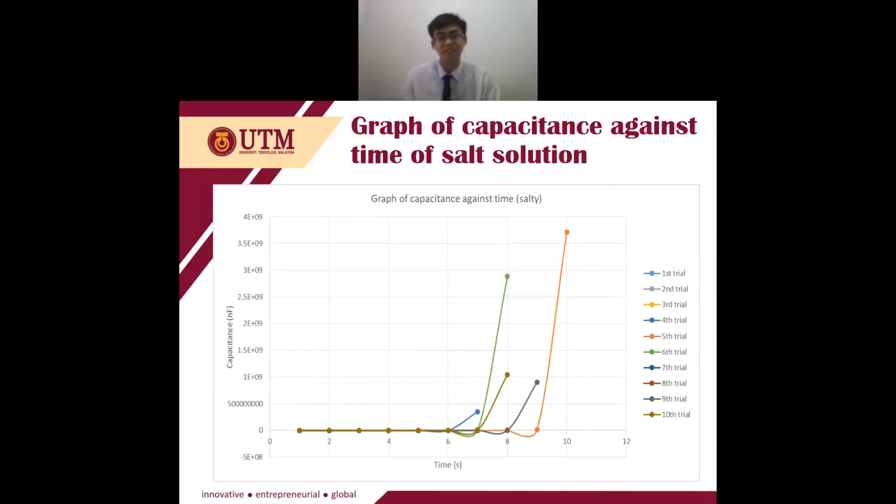For this one, the graph of capacitance against time for the salty taste solution, and this one is for sweet taste, and this one is for tasteless.

Okay, I found that there are some weaknesses in this project. The first weakness is the paper-based sensor cannot be reused after several trials of testing, because the paper will become soft, and this will cause the capacitance value to show INF instead of an exact value, which may reduce the accuracy of the LDA plot.

The second weakness is the sensor may not detect the solution drop in a short time, causing both values to remain constant after several testing trials. This is the second reason that will also reduce the accuracy of the LDA plot.

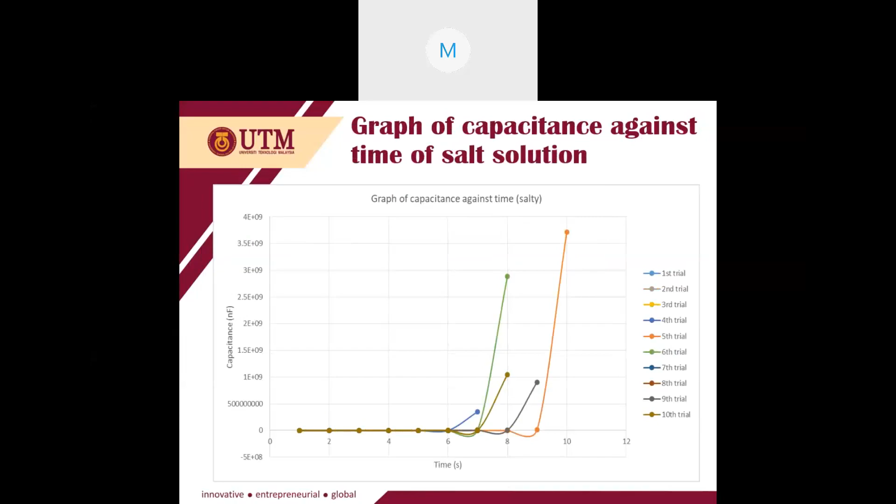Okay, and for the features used, there are several features you listed just now. I'm still not clear what that T is about - is it time? Is T equals 1, T equals 4 - what does it mean? Is that the first reading, or time, or what is it?

That T actually means the first value of the table. In my demo video it also shows some of the resistance values, which means the first value is for T equals 1. T equals 10 means the 10th value. Yes. Okay, okay, all right, all right.